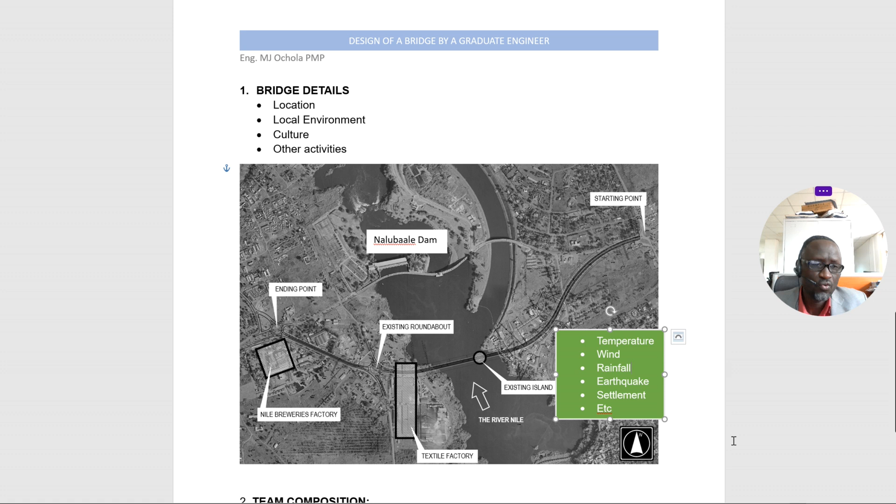Like in northern Uganda, you have only one season of rain. Therefore, normally when it rains one season, you could be having those flash floods which come and go. Then during half of the year, you may find the river is running very low. So your structures that are in contact with water could be having very low actions from debris and water.

The culture is very important in other activities. If you look at the Nile bridge here, the one I've shown you up here, this shape, by the time they involved a bridge architect, normally these bridges you see do have architects. There were a lot of combinations here. They had to look at the culture of people in the central, the activity, the traditional use of the calabash, the colors. Many things were taken into consideration.

So this figure you see, it had a round. So they put in a lady from Jinja, and that lady was carrying a calabash. No, she was carrying a pot, a small pot, like from the well, from water, and then she was coming back home. So then they looked at that, then they said, okay, fine.

Then they were looking at people, and if you look at the Japanese and the Western world people and the African, especially in Uganda, our body configuration varies. So during the presentation, they made a joke, and they said that the Ugandan ladies have a figure 8. So they drew in a figure 8, which one day I will try to sketch. So there's a round here, the pot is here on the head, then this part like the neck coming down and shaping it down, and then you have the hips going down. It was like a joke, and they laughed because there were different configurations, but that was it.

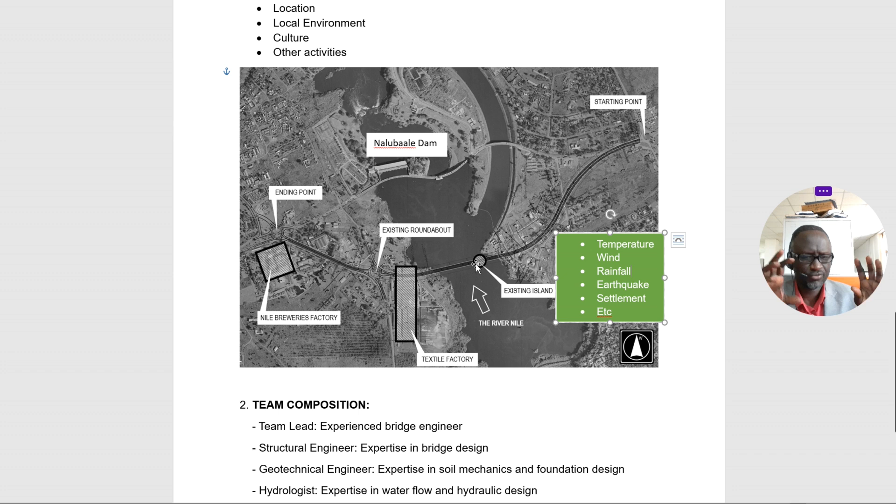Definitely, that means for a bridge located in this area, especially the superstructure, which is what you see above the ground, the superstructure system can be typical. You have no problem. But as you are going down for the soil structure interaction, the soil type matters, soil stratification matters. So that's why it is important you understand that.

As a young engineer, even when you pay a visit, you have to make sure you study around and see how things are, the environment around, the people around, activities around. You may find there are cattle keepers, that is a cattle corridor. So that will help you also when you are planning the deck sections and the bridge detail and the rest of it. You get to understand.

Even the way people manage solid waste, like some bridges we're building in Arua, Enyau is in the middle of the city, and then you find Nyacara also was in the middle, and so now you have to consider activities around and the rest. That's why it's important to understand. So the location is very important. The local environment, culture, this is important.

So as a young engineer, if your university is teaching bridges, normally these factors which we are supposed to take care of during design are all captured. It's very important, because even the bridge construction alone affects normal life of the citizens or settlers in the area. So the environmental and social aspects need to be taken into account, whereby sociologists have to come, talk to people, let them see. That's where stakeholder management has become very important.

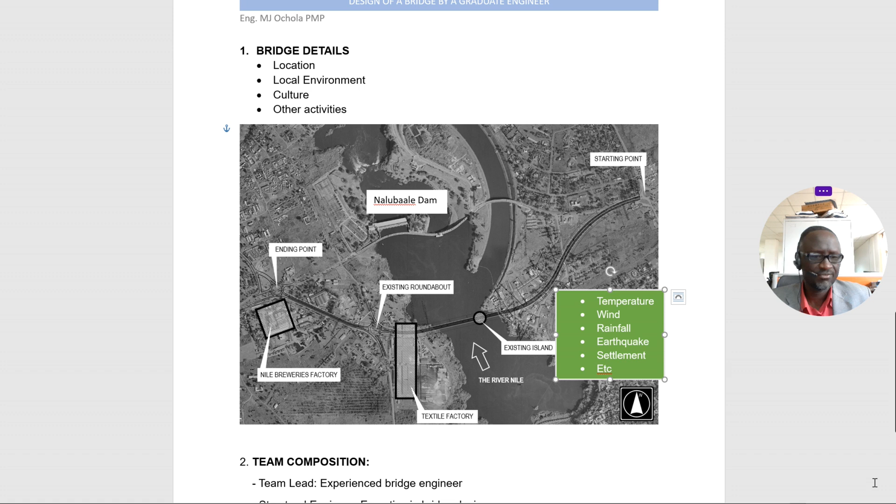So this is just a typical location. You can have so many. You can cross so many bridges. You can actually look at it. Now the next thing, when they tell you to design the bridge, you say, okay, fine, then where is it located? Then you begin to internalize. You begin to understand certain things. Even when you go to site, these are some of the things you start picking.

But now, a bridge is not designed by one person. But your boss is saying, please, we need this bridge. In the next 3 weeks or next month, I will present it to top management, I want the bridges to be ready. So you say, okay sir, that's okay. You go back to your room, jot down all these points.

You might be now the team leader, because you have been given the task. So you are the most responsible person now here. So you look at, as a team lead, the experienced bridge engineer. If you're not, you can also suggest that you get one, but you can now do the coordination role. You could be the expert bridge designer.

So you become the structural engineer, and then you give respect to someone hired and you do the team lead to guide. So you need to have an experienced bridge engineer. Then you need to also have knowledge of the structural engineer. Now that is you, because this one can also guide you. So now then you come.

Then you need the geotechnical. I told you the soil type, location. Soil type is very important. If you get rock, how do you handle rock? So the experts in soil mechanics and foundation should be part of your team. You also need hydrologists, because the bridge openings are determined by hydrologists. So it is very important that you get this on your team.

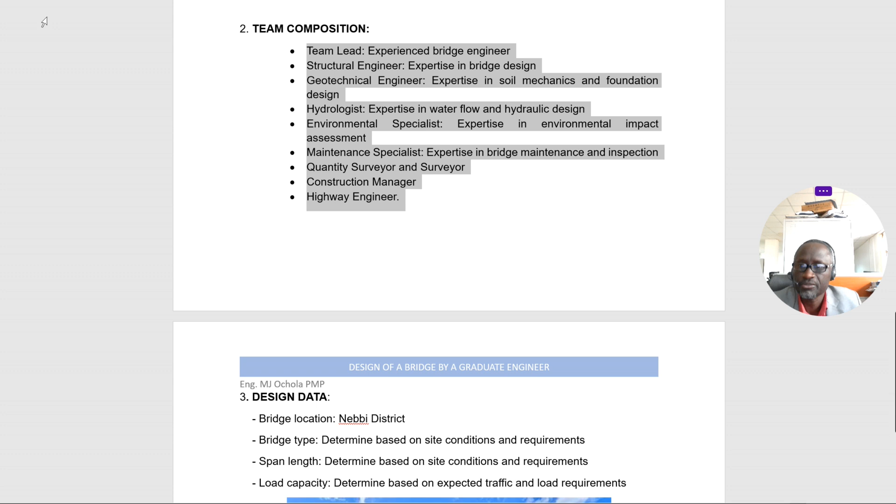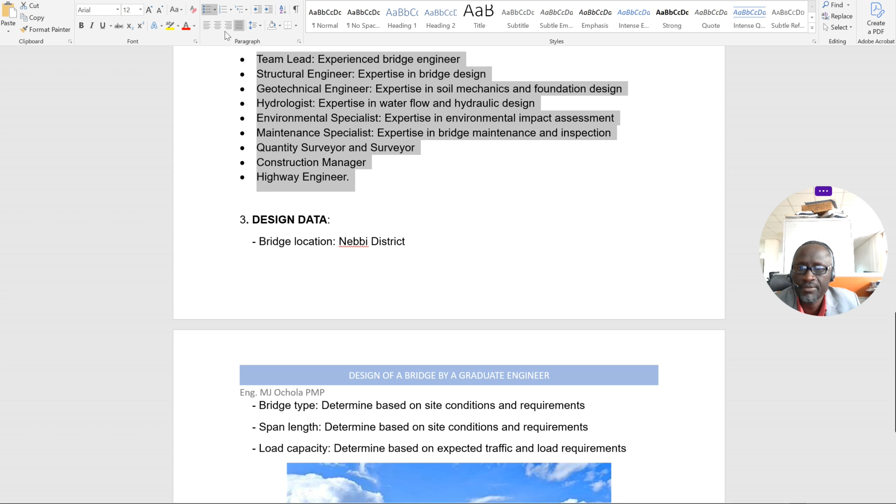Even the highway engineer also should be part of this. So I put for you highway engineer, then I can leave it, the rest you can think through, because a bridge is actually part of a road link. So you derive that from how the road behaves. If it is in a curve, your bridge also will be in a curve. If it is in the slope, the bridge also will be in the slope. So it is very important. So all this is derived from the highway engineer's design, and then you fix in the bridge. So the team composition is very, very important.

If you don't know the team you're going to work with, you will get into problems. You just start running away from your bosses. You'll not even do work. Now, once you have gotten the team, then you get to know the design data, the data you need. The data is very important. Of course, the bridge location, I've given a name here. I've put Nebbi. The bridge type, that one normally is done.

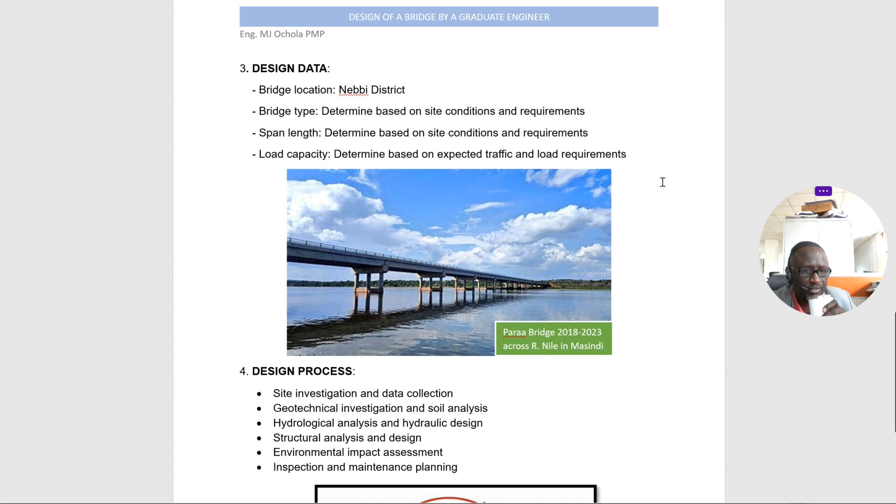You can actually do it from the literature, and then you get to understand the bridge type, whether it is steel or concrete. You can do steel truss, steel composite, or if it is concrete, you can have reinforced concrete, slab concrete, and then you can have post-tensioned or pre-stressed or reinforced concrete. And then the span length normally is determined from hydrology, from hydrologists; they do the calculation of the catchment area and determine the discharge. Some of you have done water resources, at least you have some basic knowledge here.

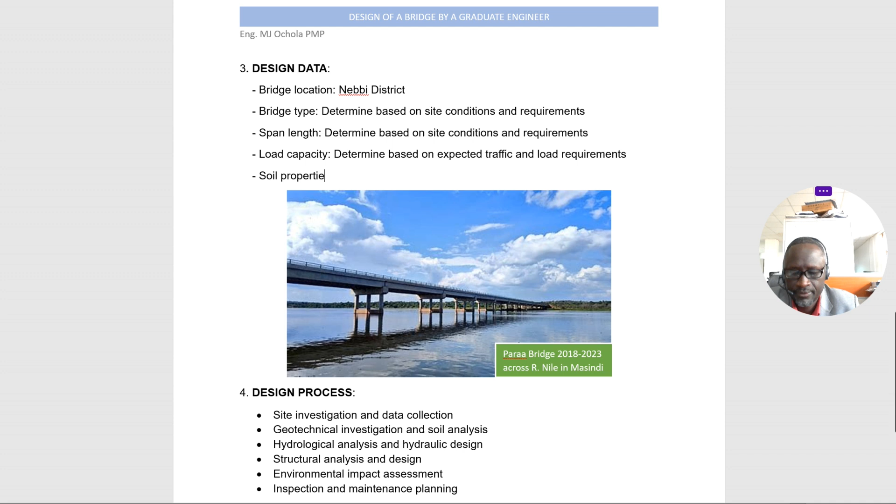Then quite a number I've not mentioned, but at least now with this discussion you should be able to. So you have to have soil properties. Then you have to have the discharge, and other things, etc. You will learn. So the load capacity here, we don't need much, though you need to know the expected traffic and load requirement. That is very important. So you're going to see the references. Some of these things you can get from the references used for design.

But as a young graduate, they have said design a bridge. So what rings in your mind is, where is that bridge? Who am I going to work with? Do I have hydrologists? If I have the in-house team with all these credentials, then you put down all this, you prepare your work plan, and you start with all that.

These are the team. You can actually ask for a formal appointment now from your boss, a formal internal memo, so that you are able to now get the people, get them on board. The first thing is introduce the topic. You ask for facilitation, get the drivers who know the place, arrange.

If the team are more than 6, 7, maybe 2 cars or 3, you visit the site, get to know people. When you reach there, make sure the local council people, the local area leadership are aware. You ask your representation in the district, they are aware. All of you meet, have a discussion, look at the site. That is the first to familiarize, and then you have the initial meeting.

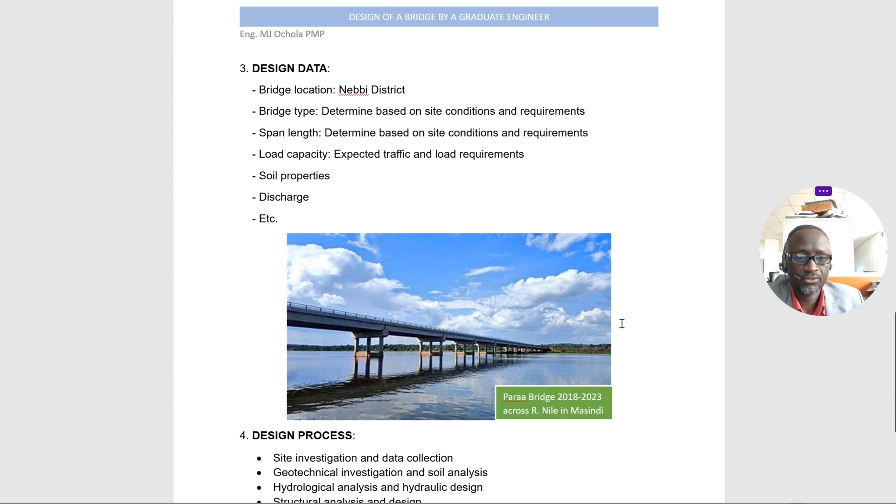You can see the pier support system is a pier column system, and this is where I'm telling you that knowing the site is very important. The geotechnical report here revealed no rock encountered, so they had to go all the way down. The geotechnical expert advised, and that's how they handled it. So basically, this is it. So the location matters.

Now, when you look at the Nile, this bridge, which was here, this area, this island you see is a rock. The rock outcrop here was too much. Within it was deep and strong, with UCS values going more than even 100. But as you go down, even when we were dealing with Isimba, you're going to see Isimba down, we were drilling through rock, serious rock.

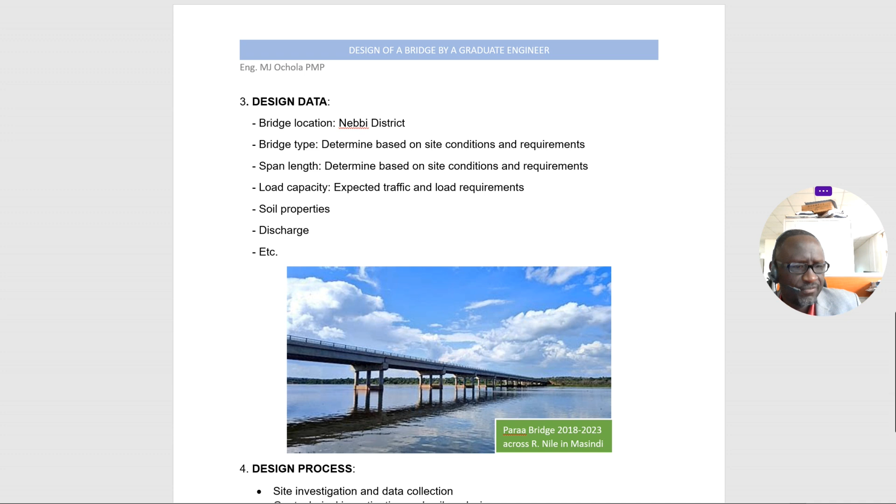As you go downstream, Karuma also has rock. The existing Karuma bridge has rock. Even the new one we are going to work on has rock. And so the terrain, the whole geography, it's a bit the same in Uganda, but as you tilt away, it's a different soil pattern, a different stratification, the environment is different, everything. So that is what you need to know about this. It's actually in Murchison Falls. So that is that.

After the design data and team composition, what needs to ring in your mind as a young engineer is, what does it take to design a bridge? What is the process? These team members will go and collect data. Yes, they will collect data for you. After collecting data, so what?

Now this is where a bit of project management comes in, a bit of coordination comes in. How do you plan the thing? Who is the first on board? Who is the second? Or which activity should get completed before the other one? Or which activity can run parallel? You look at these things, so you find, okay, site investigations and data collection. Then you're on a site investigation now.

Site investigation is actually wide. Sometimes they may tell you about a site investigation, then we rush and say, okay, this is boring, that is drilling. Survey is also site investigation. Environmental study is also site investigation. You are investigating to get more data about that site so that you are able to fix the bridge, design it, and construct it. So basically, hydrological analysis and hydraulics.

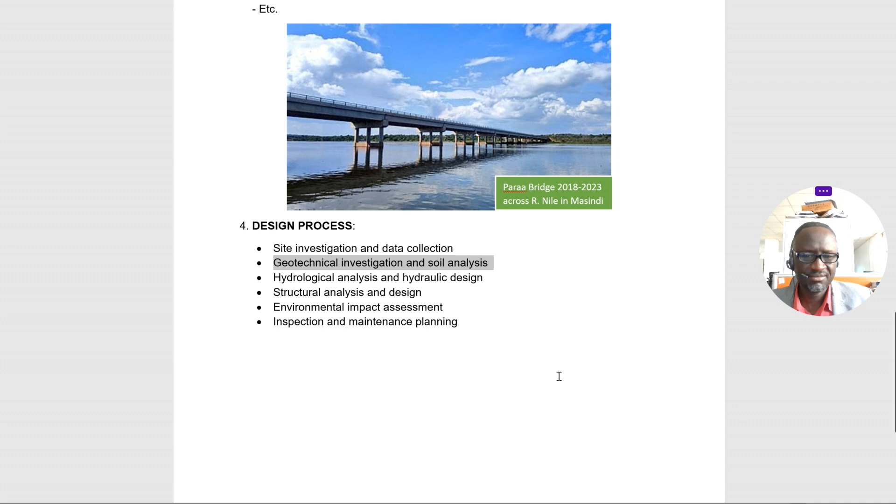The day before yesterday we were at Pakwach Bridge, and CCC is trying to do geotechnical investigation upstream of the existing bridge. Because this is River Nile, it is very deep and a bit stubborn, it flows with floating vegetation, they first have to prepare a jetty. You design your jetty and a platform. That platform is where you mount the drilling rig, you set it up, and that process alone can take a month or 2 before you start the actual drilling.

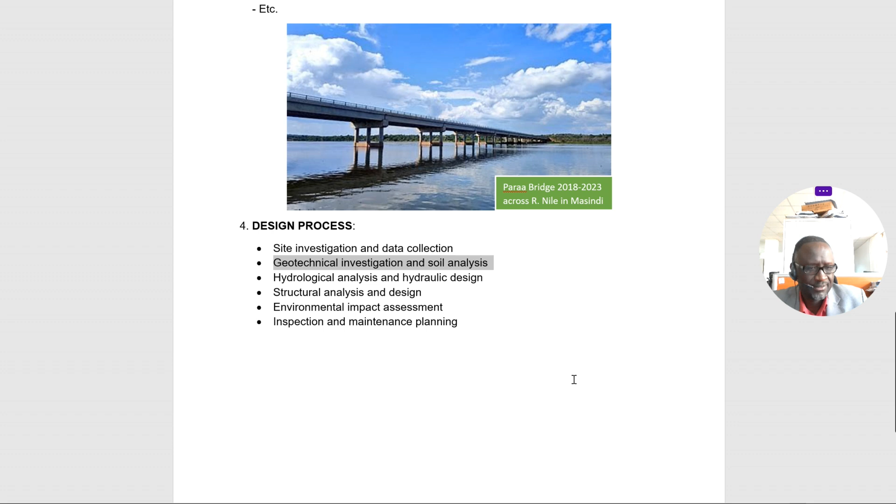That process helps you gauge the schedule or the timeline, and guides you as a young engineer that the commencement of implementation may not be in the next 3 or 6 months, because 6 months alone could be the time for data collection. But because you now have a task, you start getting all this information. You get the stamina and say, yes, I'm an engineer here, and you talk with authority. This is where people derive authority: knowledge.

Environmental impact assessment is very important. Our construction processes destroy the environment, and therefore it has to be regulated, and that is why environmental guys come on board. In South Africa, I think 1 or 2 projects have been made where the project manager is not a civil engineer, it is the environmentalist, because your component is going to be put in an environment. So the environmental expert understands how you should do it and will control your process. Very soon, most managers will be the ones.

If I cut a road, my road is going through a forest. We did Masindi–Kisanja up to Paraa Bridge. We were controlled by NEMA and guided very well through the forest. We were not supposed to create a bigger opening, because the forest on either side of the road must interact to allow the different monkey families and baboons to communicate from up the trees. So when you are driving through, you find the road is narrow and the trees touch.

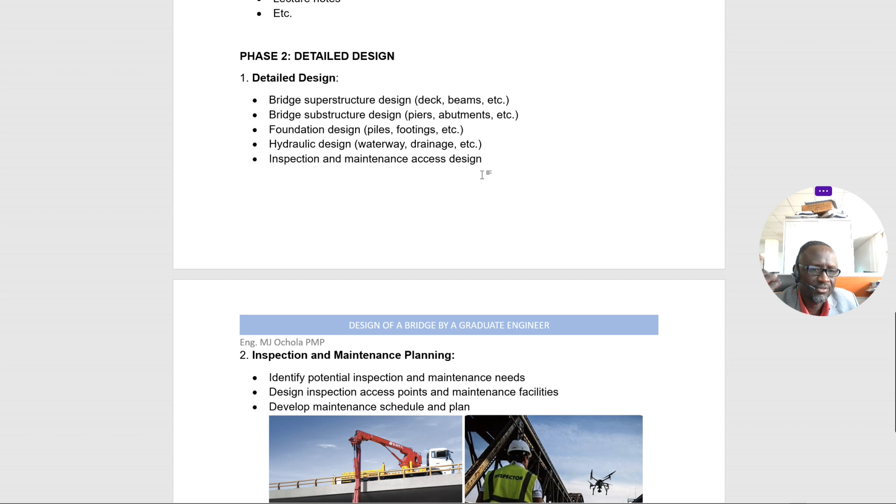But again, I told you, there's a bit of planning you need to do. If they give you only 1 year to deliver, you may not wait until all this data is collected. You have to plan some data you need to start with by the time of doing feasibility. By the time you start detailed design, you may find it's only left with few things. So you need to know what you need to do before the other one, and then the geotech, hydrology, survey can all happen at the same time. Even environment, even social. But of course, environment may need to wait because they need to know where exactly the approach roads are passing and the bridge is located. Then they can do it. These are one example.

So the survey and highway become key, because once they do the topo, the highway determines this is the best location, and the structural engineer also confirms. Then the study can be done, because even hydrology may do it a few meters downstream, a few meters upstream. The same happens to the surveyor's cross section downstream, because you can still adjust. So now you begin to think along that.

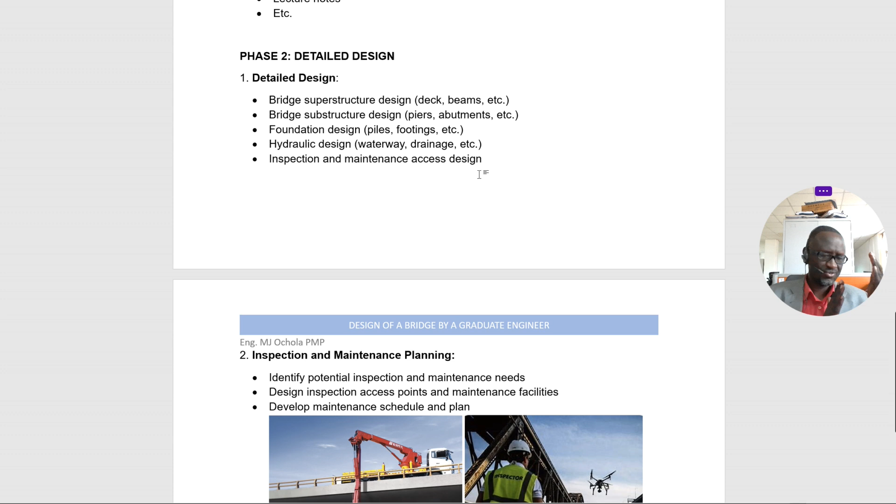So you may dispatch the whole team to site, or first week they will go collect some data. Then the team leader, the structural engineer, will begin to sketch a few things, and then you need to do both internal and external engagement. Internally, they will tell you what needs to be done. You get guided. So you need to do a lot of listening. There's a lot of lessons to learn, because you are a graduate. You are new. There are experienced fellows who have been in other companies, they know what to be done, but they've not been given the responsibility. So you need to listen and do. Ask questions, ask for guidance, accept to be trained. Because some people need that ownership, that so and so is my boss, is coordinating, but he listens to me. So it is important that we do that.

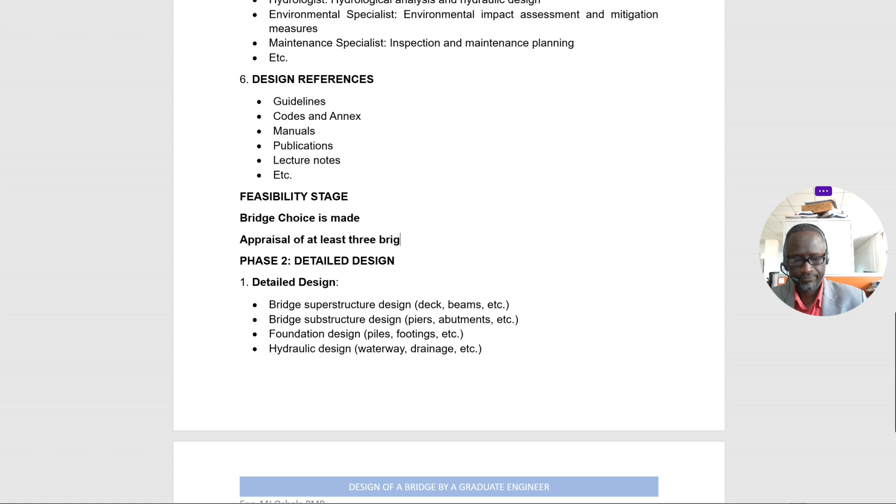In the detailed design now, you come from feasibility. Here something will confuse you a bit. What I would have done is to have, in the design reference, a bit of feasibility before going on. So you need to have a feasibility stage, where the bridge choice is. So you do appraisal of at least three bridge types to get the preferred one for detailed design. Very important. So that summarizes that for you.

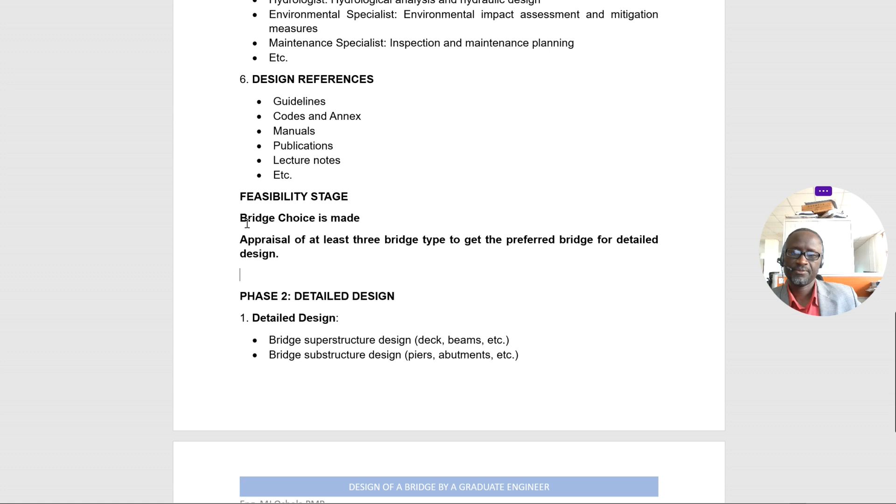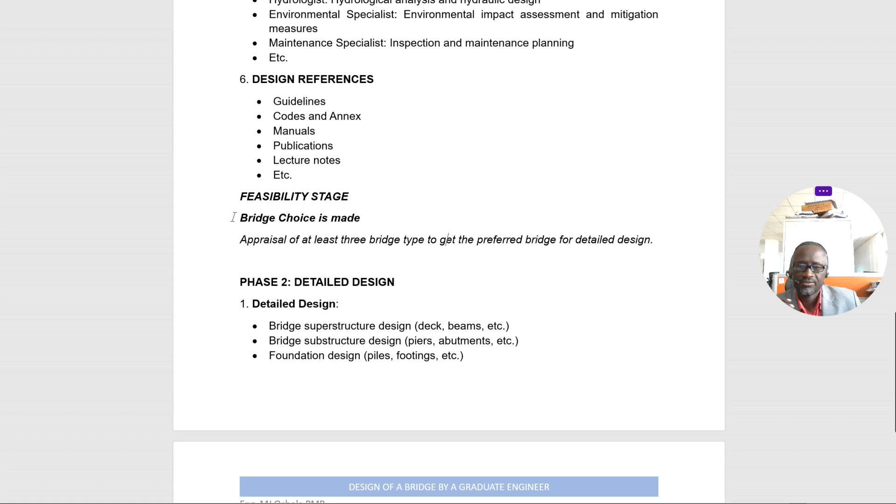So this is exactly what we do. This stage is where you do preliminary design, and you could even be doing it as they are moving with these other activities. So when you've collected all the data, you've chosen the bridge. Now you can do superstructure design. Now you know if it is steel composite or a deck and beams, etc. Then you do bridge substructure design. Of course, there's what they call bridge deck load analysis and design. So you must also know what loads you need to apply on the bridge. That one we are looking at in the deck load analysis. But for now, you've done your feasibility, and you move to detailed design.

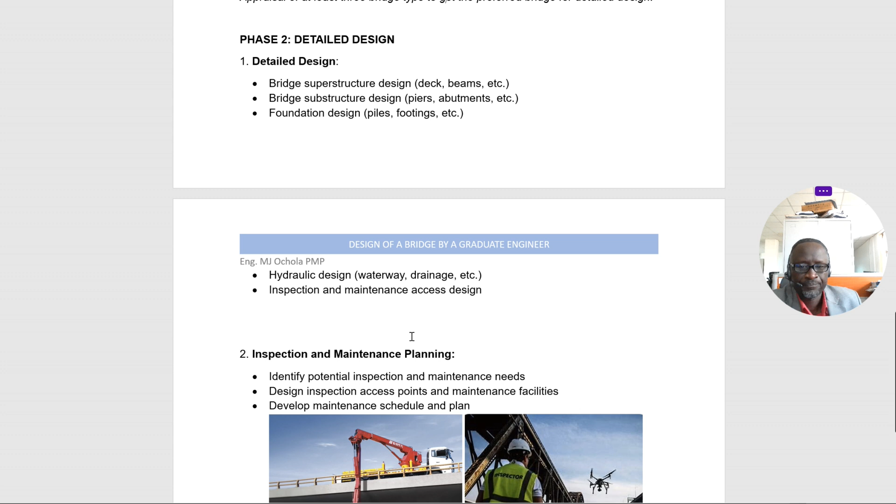You do bridge substructure, that's the pier support, abutment, foundation design, pile footing, hydraulic design, waterways. Of course, now hydraulic is also trying to refine. Now, inspection maintenance planning, I told you, this is the knowledge you need to have. We are not doing that inspection, but at least you know.

If you're going to use a drone, then you say, okay, fine. How do you monitor your structure? Because today drones are a new technology they're adopting. Previously we were doing it manually. You climb, use the ladder, inspect the bearing. Now you can use a drone and can even generate the 3D. Even all these other hidden things you can use a drone to do it.

Then this is the vehicle thing. Now you can see this is the long arm. This is the vehicle inspection. The inspection vehicle can take you around to inspect properly, and of course you need to make sure they are part of it. If you are not doing this and doing the local one, you have the down ladders here,

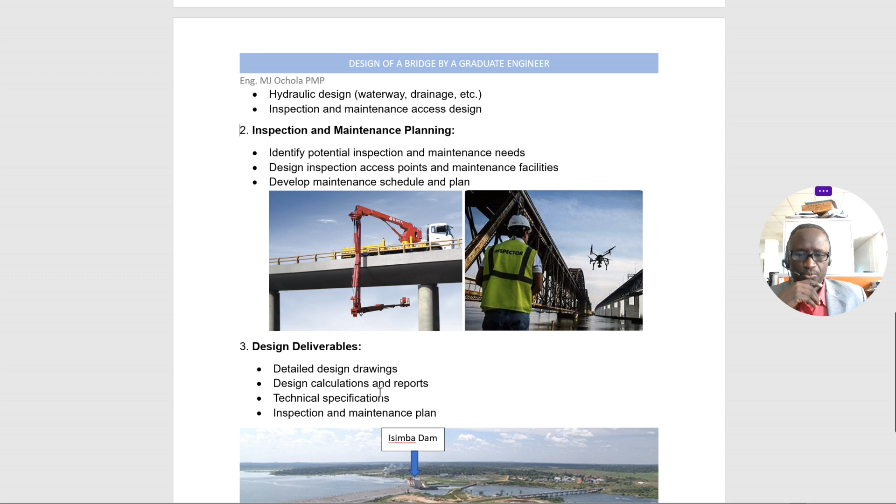and then around the bearing area. So identify potential inspection and maintenance needs, design inspection access. All this knowledge helps you to plan for a bridge that in future has proper access for inspection and proper access for maintenance.

Then the design deliverables, you also need to know as an engineer, what do they want? They said we want the design of a project. The design of a bridge report, you need to have detailed design drawings. That means you need to have on your team CAD engineers, people with AutoCAD knowledge to do a draft.

Technicians should be there. Technical specification, inspection, maintenance plan, detailed calculation reports. So all those guys will give you reports. Your technical report, hydrology report, structural report. All those will be your attachment, but also you need to give a narrative report. Yeah, very important.

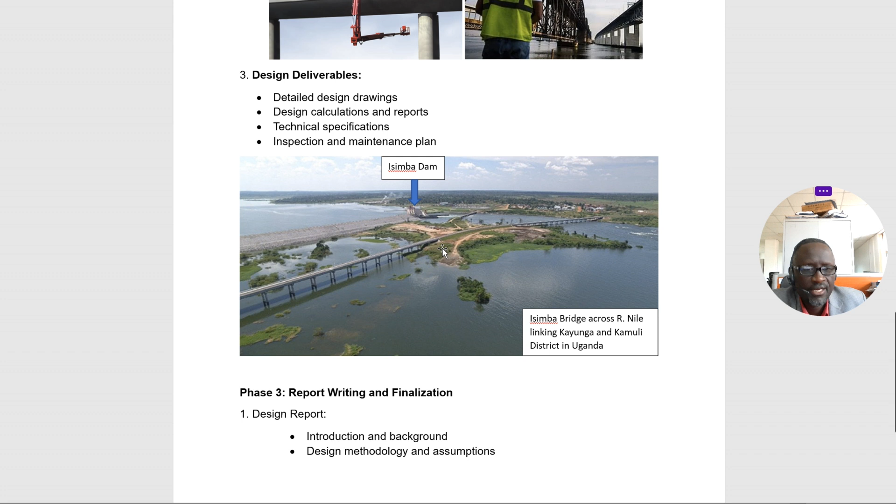So this is your Isimba. The Isimba bridge is about 890 with the cover island here. Upstream is the dam. Downstream is the Isimba. This is the one they used for construction of the dam, to the cover island. The other side is Kayunga. This side is Kamuli. And all these areas, each of these piles are all bearing on rock. That's the benefit upstream of the River Nile. As you go down, I told you to Para, it is still sand and the rest of it.

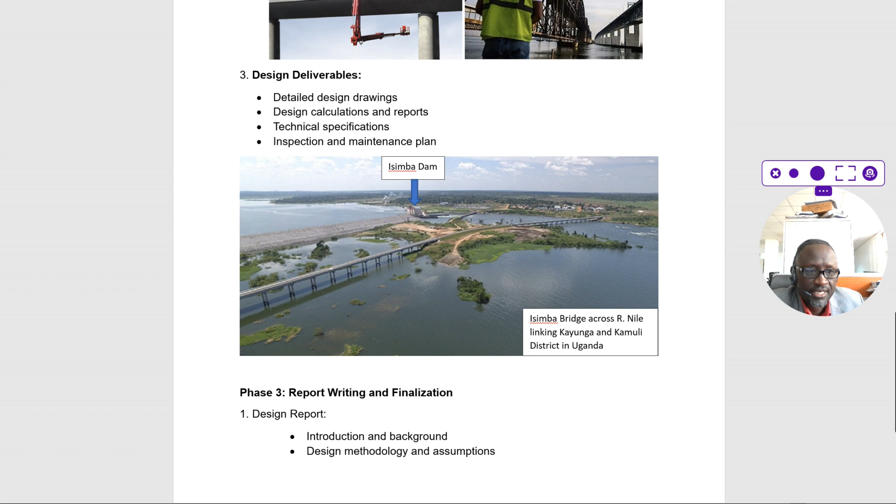After you have this report ready, then you do your report writing and finalization. As the engineer, you look at introduction, background, design methodology, assumptions. Of course, you may not get all the information to do your design, but in some areas you make assumptions, and these assumptions should be consistent throughout, even up to construction.

Sometimes you may find you don't have access to a drilling rig, but you can do DCP. You can do DCP, but make sure you also advise and put in the report a recommendation for detailed additional tests to be done by drilling during the mobilization stage when construction commences, so that the engineer can revise the foundation accordingly. DCP can give you some information, because it can go to about 5 to 6 meters below riverbed.

But in most cases, if you are lucky and the river is on rock, then you normally encounter rock early enough. Just make sure you confirm the rock is continuous, both down and on the side. Then design results and recommendation, inspection maintenance plan, conclusion and next steps. Then the report review.

Normally it's important to do quality assurance. You have your team leader review the report. Each of these guys can do it. You have some internal presentations. Make sure the whole information is captured. The flow, logical flow, the grammar, of course not all of us are good.

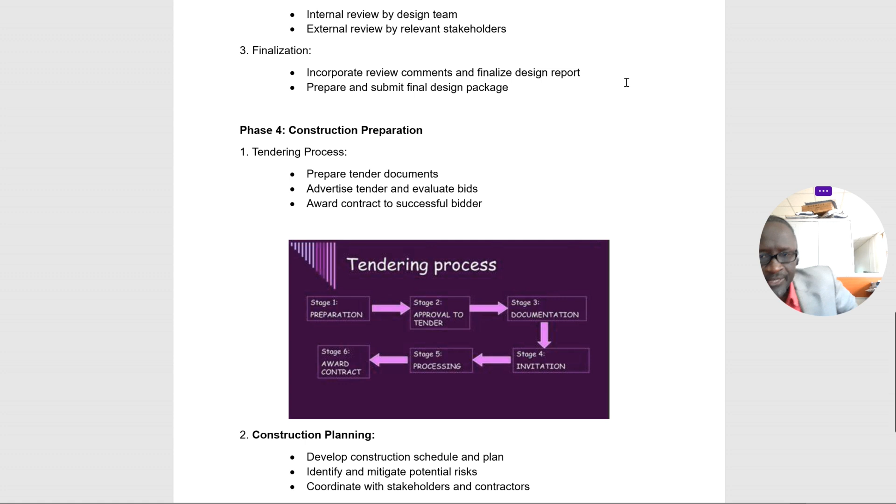Quality assure everything, and then from there, once it's done, incorporate review comments, finalize the design report, prepare and submit the final design package. But also it's important to keep your boss abreast every time. So you can say every week you give a snapshot, a bit of a brief of where you are, what is the remaining time, achievements made, maybe there are challenges, so that when they're updating management, they don't call you when they're already in a management meeting.

Always make sure you save your project, let it be in your official email, personal email, WhatsApp, because anytime they can ask for that information, you should be able to avail it. So any communication you do, make sure you copy yourself in all the correspondences. Make sure you copy yourself, because anytime your boss can ask for a report, and immediately.

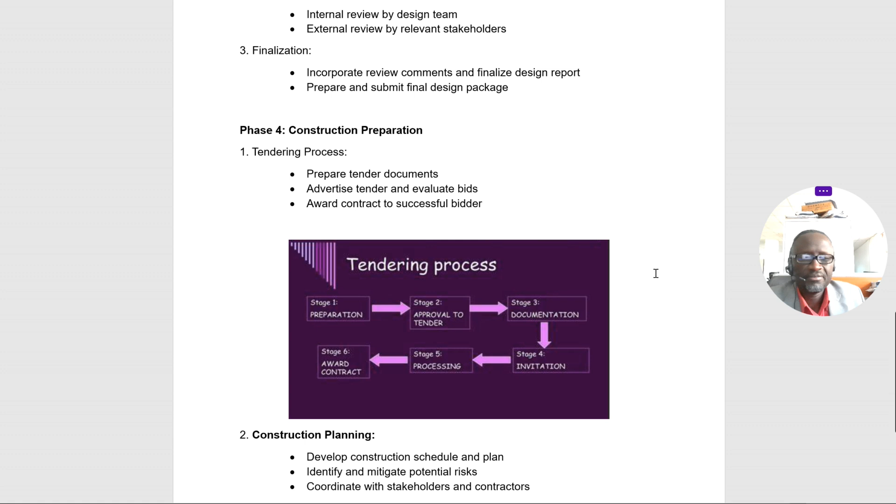Yesterday, when I was heading to Pakwach, fortunately I moved with my laptop. The former director, he's head of network planning engineering, called me and said, Michael, I need a letter which you wrote, the Word version you wrote in May 2023. Can you share that? I said, yes, sir. I quickly opened my laptop while we were moving, found the thing, sent it to my WhatsApp, forwarded it to him, and everything was fine. I was not saying, let me come back, I've traveled to the field. Because sometimes we need to know how to manage stakeholders.

So in the construction preparation, also think along. You need to understand that in procurement, normally a lot of queries come from bidders. So as a designer, you need to be aware that all the reports must be logical. Your design drawings must communicate with the design narrative. If you talk of concrete grade, it must communicate. The general specification, you also need to know what is the category. So you need to know that everything is specified.

Normally contractors come and say, your drawing is saying class of concrete is 45, the design report is saying class of concrete is 40, and the general spec is saying it is 35. So that's where they start running. Now what do we do? So it causes a bit of delay and can easily end up with overrun on time and cost. So it's very important.

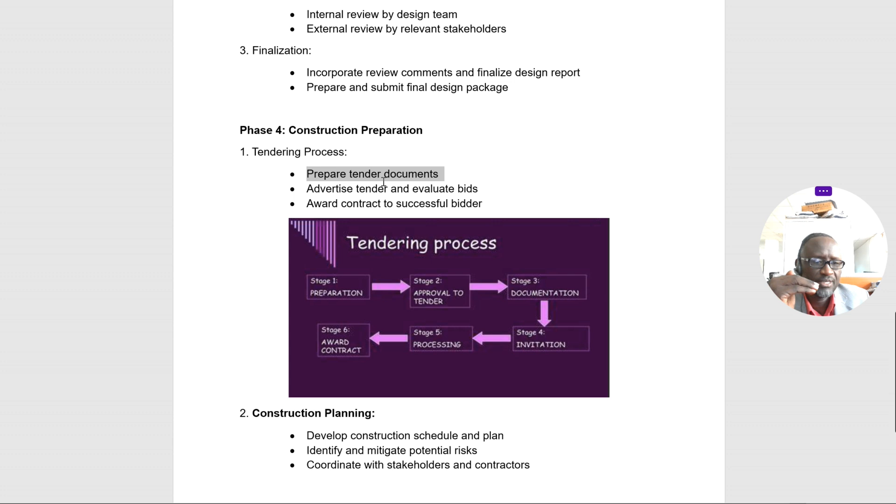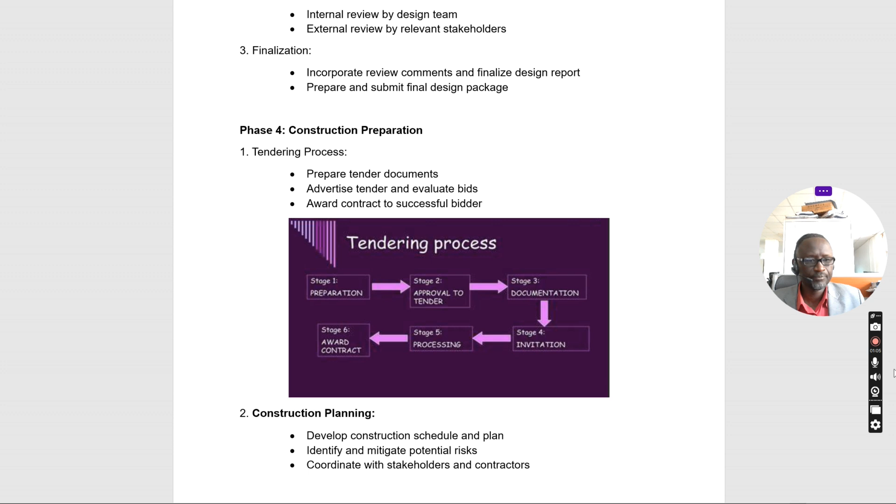So in this tender process, you prepare the tender documentation, but the rest you have already done. All the design reports form part of the employer's requirements. Then the procurement department handles the standard documents and the way procurement should be done. Then the advertisement is done. For evaluation, you as the graduate might be part of the evaluation team because of your expert knowledge. They always call you. Then there's award of contract, and the project goes on. If you are lucky, you continue with the supervision.

Then construction planning. I told you there's a bit of planning even here. Even the design report sometimes has some planning already done, like inspection and maintenance planning, construction, even the kind of equipment. A designer should be able to anticipate. The contractor can come with what they think works, but at least you have an idea. So normally, when you're doing design, you design, construct, plan and maintain from your computer. Look at it all and understand it. That makes it better when they're discussing. You're not lost.

So you develop the construction schedule and plan, identify and mitigate potential risks. So a risk register must be developed. Your outputs, stakeholder engagement plans, risk management plan, all have to be there. A communication plan also has to be part of your report. Very important. Then coordinate with the stakeholders and contractor. This is the construction planning.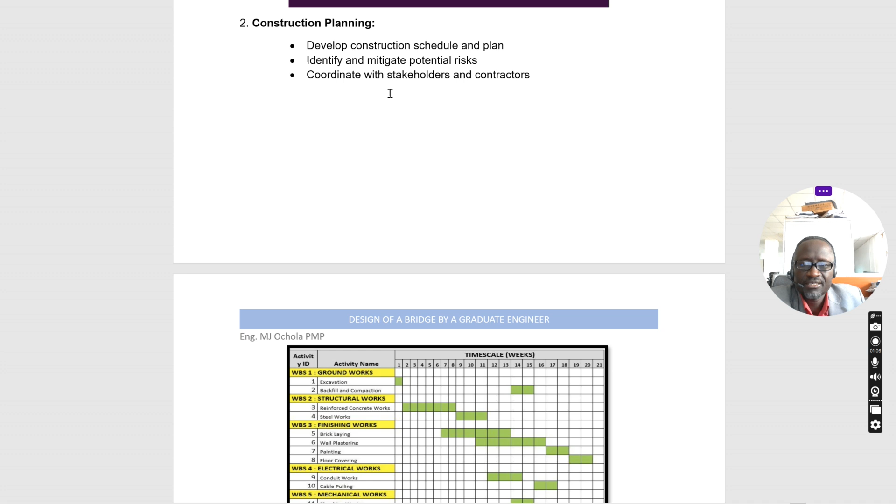So you can see these are the different plans: groundworks, excavation, backfill, structural works, reinforcement, concrete. This is just to show you that you're also responsible. Normally you're not a surveyor, so the different team you have will do this for you. You have to coordinate. You need to know who can provide what. You can also use MS Project, which many people can use.

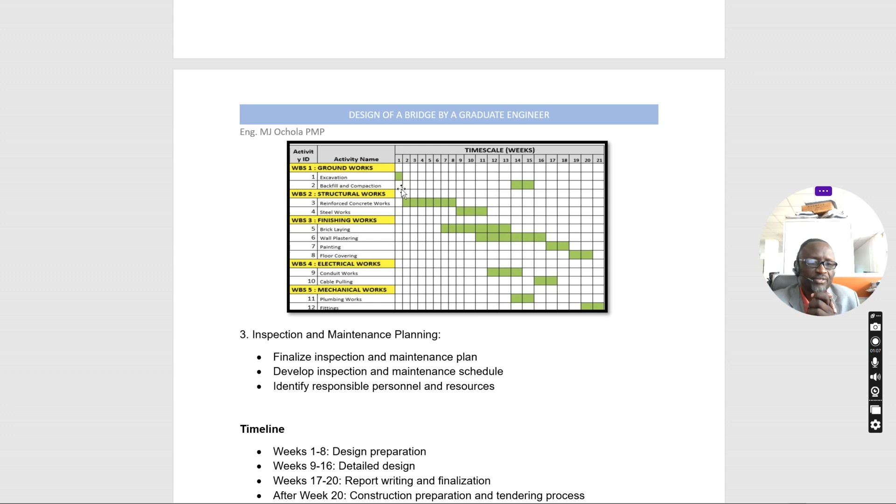So you need to understand this one. I think they use basics. So you can do MS Project, or you can do Word, you can do Excel. Yeah, so basically that is something you need to be aware of, that you can also do this planning and it can also form part. Then the contractor can now return, and then they can give theirs with the explanation, because they are the one going to implement the project.

Inspection and maintenance plan, finalize inspection plan, blah blah. So of course, here I want you to map. This knowledge is important to guide your construction. But even this planning here also helps you to understand. I'm not saying now we are going into construction. Construction, if you are to talk about it, has its own merits and what needs to be done.

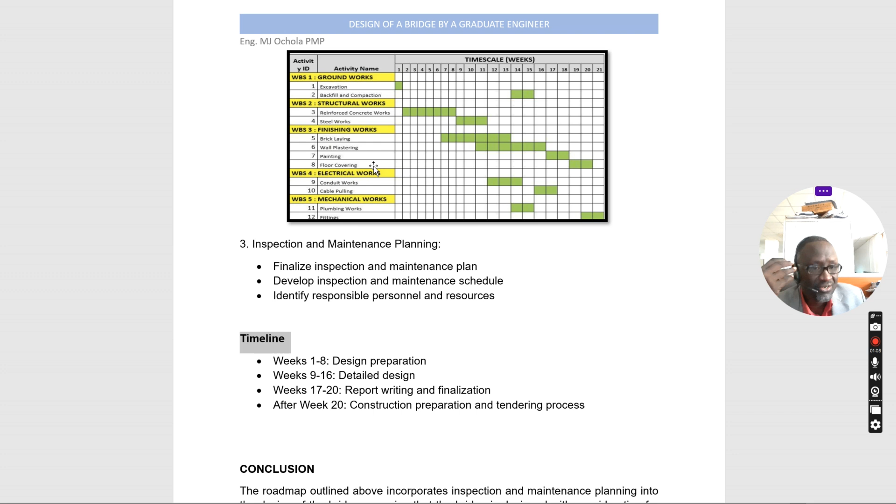But as a designer, you must be aware that I design, I can follow construction, and I also follow the maintenance. Are they making sense? Are they flowing? Are they communicating? So that is why you need to know. You see, even this timeline, I told you can give timeline in construction. Even that design you are doing, even data collection has timelines. So you must be aware.

And when you are in a meeting and you are coordinating, you can ask each of them, I want your detailed work plan with costs and timelines. You get it? So all of them, even risks. So you can now compile the risks, and that's what you always explain. By the way, when you are going to your boss, he doesn't have time. Make sure you understand the kind of report you give your boss. Normally 1 page or 2 maximum, and hit the point.

Project detail, the scope, what you are supposed to deliver, what you are doing, how much you have done, what is remaining, when are you delivering. If you can't deliver, you have to start saying. So the risk affecting delivery must be captured. The stakeholders, some stakeholders might be difficult and therefore may require your boss.

That's the most critical thing that normally many of us as young engineers fail to do. First project you fail. You become emotional, you become passionate. Remain technical. Always remain technical, explain your technical area, the implications, the successes, positivity, so that people understand. Simplify the English. Some of you studied from Birmingham, others from where. You tone down, and actually you can even speak broken English so that people understand you.